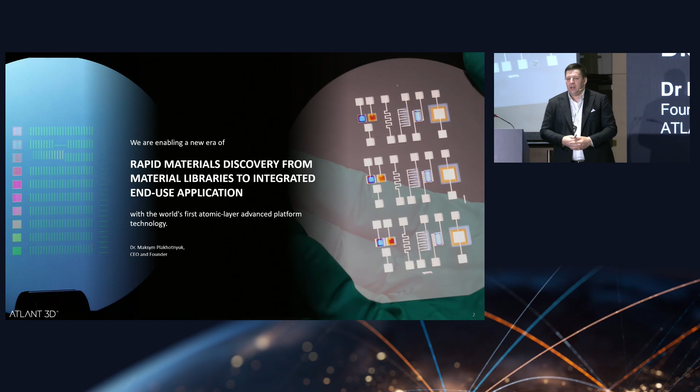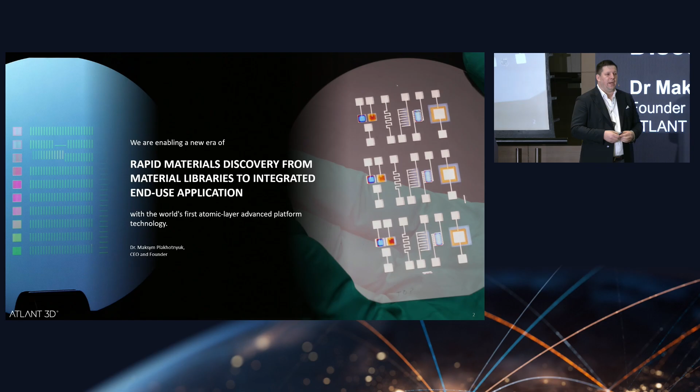So what we do, we develop new materials with atomic precision by discovering material libraries. We print materials atom by atom, and not only this, we make micro-nano devices at the same spot with the same tools. Why do we need to do this? Our civilization is defined by materials. We started from the Stone Age, Iron Age. Now we live in the Silicon Age and are moving to the AI Age. And for the AI Age, we need new materials, the more the better. And this is also the definition of new inventions.

So how do we imagine our future? We imagine our future by defining new materials. The materials that we have today are quite limited. However, they define what we can invent today and tomorrow, from clean energy to quantum computers to biotech and semiconductors. And with the AI era, we can make this absolutely different. AI can enable creation of new materials at the speed of light. We didn't do this before.

So far, we have been spending 90% of our effort on inventing materials, and they were staying in the labs and didn't leave. Today, the largest companies are trying to find new materials and speed up this process. There are geopolitical tensions to control materials, from lithium to semiconductors and more. We need to find new ways to make them. With AI initiatives, like from NVIDIA and Google and others, they are looking at how AI can help.

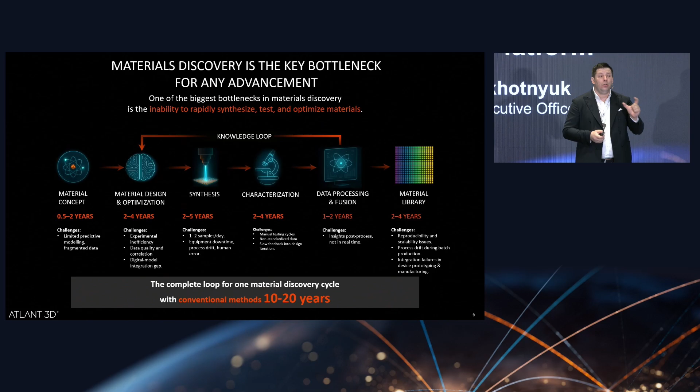However, when we look at the method of how we invent materials so far, it takes about 10 to 20 years to bring a new material into applications and industry. So where are we stuck? We are stuck at every point of the process, from how we conceptualize material, how we design the material, how we synthesize material. It all takes a few years, until we make only the library, not even the solution that we need for the applications.

So what is our solution to this problem? AI companies that exist today, that are heavily supported, are only one piece of the solution. We can invent a lot of libraries. Google itself, with their DeepMind, generated more than 2 million materials, but where do they stay? They don't move anywhere. They are all generated, but they are not synthesized. How are we going to synthesize them?

So we at Atlant invented the platform, the technology that can synthesize materials, not one, not two materials, but whole libraries. More than 450 different materials, from semiconductor to aerospace to biomedical and more. The core of this invention we call DALP technology. It's a hardware platform that enables synthesis, in situ metrology, data processing, and creating libraries. And more than this, we also create prototypes of devices that one could use.

You might think it's impossible. It is possible, and I'll show you how we do this. We use our proprietary technology. It's a micro-nozzle technology, a microfluidic device that allows us to deliver gas flows to a specific spot and synthesize material at that spot with atomic precision, one atomic layer at a time.

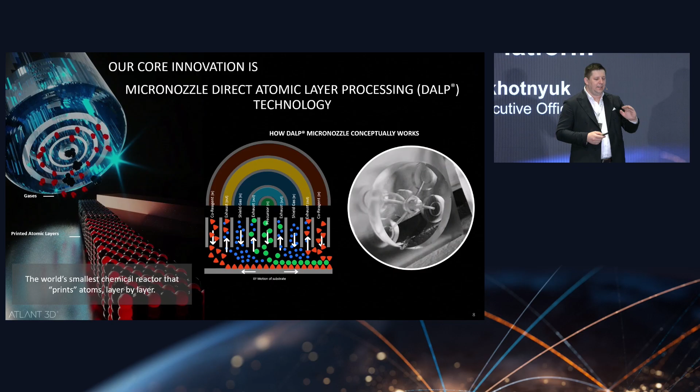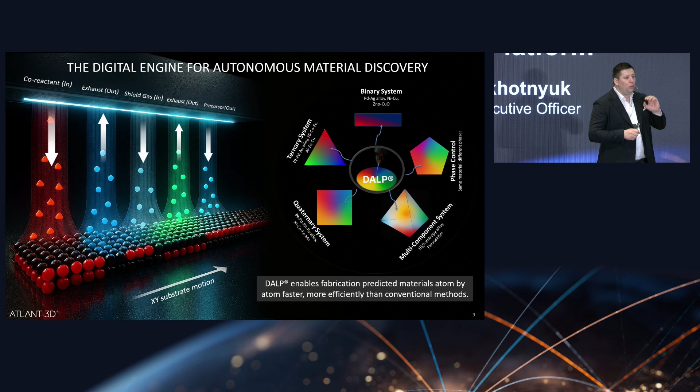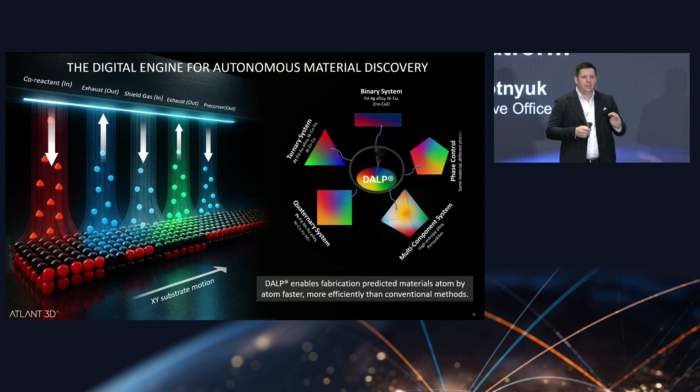So how it works: we have different flows that come onto the surface, from one reactant and a second. So we create a chemical reaction on the surface one atomic layer at a time. More importantly, you can control this process digitally like any other additive manufacturing technology, but here you can mix materials. So in reality, you don't synthesize one material, you can synthesize whole libraries of materials. Two-material combinations, three, four, five. This was impossible until today.

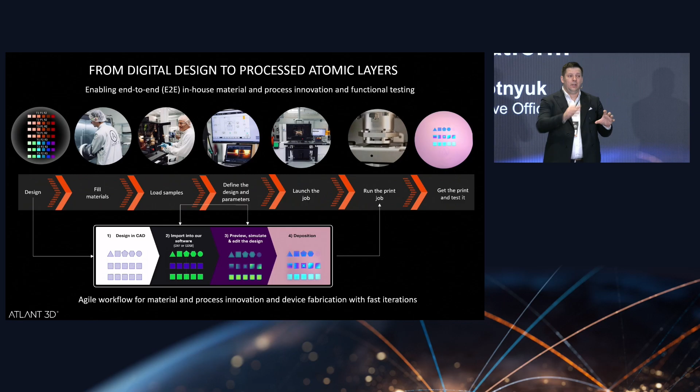This process is obviously digital, where you can design the material, submit the file similar to 3D printing, and since we also engage in semiconductors, we use semiconductor file standards, and simulate how the print would go and precisely how much time it will take. And then you get the device as you wish, not only devices, materials and devices.

This is how it happens in reality. You select the material you want from 22 categories, either for biomedical or for sensors, whatever you want to develop. You develop the library by testing many simple material tests. It happens in hours, not in years. And then when you choose the specific parameters of the material, you integrate it into devices and you see how it's actually functioning.

What materials and devices in general can you make? Materials for power electronics, for RF, for advanced packaging, for protective and aesthetic coatings, logic and memory, photonics and optics, energy applications and catalysis, sensors, environmental applications, quantum materials and frontier applications like neuromorphic or superconductors, biomedical interfaces. And this is only the overview. There could be other new material groups that we didn't spot yet.

What is the benefit when we look at the bigger picture? We make development 100 to 1,000 times faster than the conventional method. From 10 or 20 years to only weeks or months to develop the material and test it in devices. It's an exponential reduction of time, and it enables capabilities that never existed before.

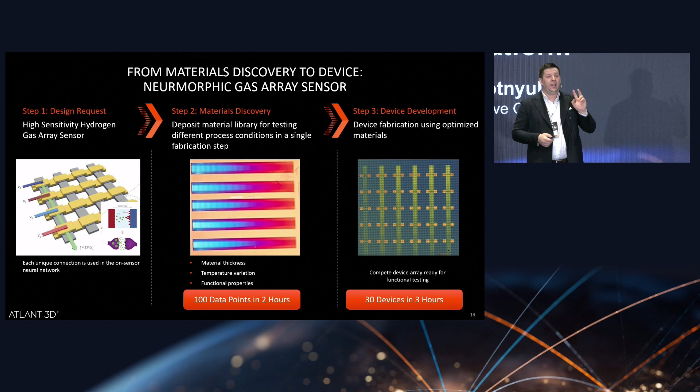Now it's moving into real industrial application. And for this, we spent only a few months with an engineer, not even a PhD-level expert. It was the engineer working on this and developing it with the partners.

This is a second example, for optics. An optical filter where you need to test and create optical heterojunctions, and also define the gradients and how to combine refractive indices. So we developed the material in only a few weeks and then completely integrated it into devices in a few hours, and then tested it, of course.

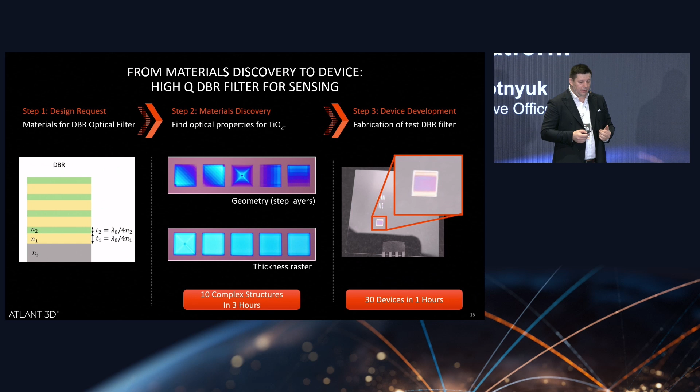So how do we make all this? We make it with different machines. Our machines are based on the same principle, on DALP technology. What is common between all these machines? That you have the same print head.

What does this mean? That you can scale from a small machine, like for zero gravity, for space, to a large machine. And if you invent the process on one smaller machine, you can easily transfer it to another one because it's a digital process. You only need to know what nozzle you use, what device will actually be printing, because this is the device that defines how you do the work.

In other technologies, you need to really know the chamber, vacuum, and so on. Here, you don't need to do this. You only need to know what material and what nozzle you use, and then you transfer, and it's working.

So right now, we are releasing the 8-inch tool that would work specifically for semiconductor applications and materials. And we are now working on a cluster that would combine different technologies together. So we integrate our technology with industrial standards today. More than this, we are now looking for partners who can help us develop the whole cluster for industrial integration.

We're already working with the UK and potentially would find a new partner soon here as well in Singapore, both industrial and research. And we're looking for who else can join us for this material revolution. It could be you. So come and we can talk after.

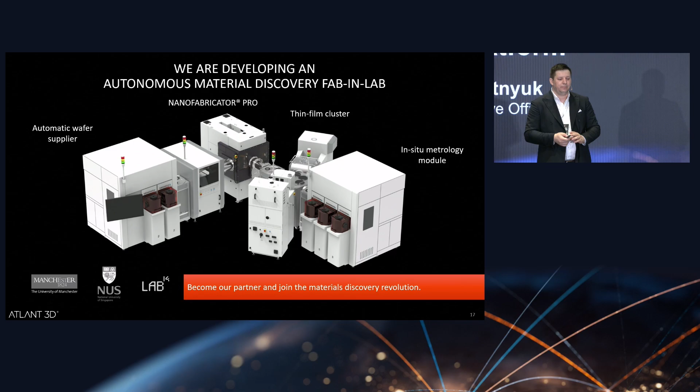So what is the opportunity behind it when we implement all this? Guys, we are changing trillion-dollar markets. And I think what I'm showing you here is underestimated. Because the semiconductor industry, particularly since I'm coming from there, hasn't seen a revolution for 70 years. We still operate on principles that were defined in the 60s or even earlier.

While we bring additive manufacturing today to print concrete buildings, where we print metal structures, the semiconductor industry is way behind. We can't even invent new materials there. Imagine what we need to do to change and how much it will influence all of us. How fast we can make microchips, quantum computers, superconductors. We will create our future not in decades, but in years or less than this.

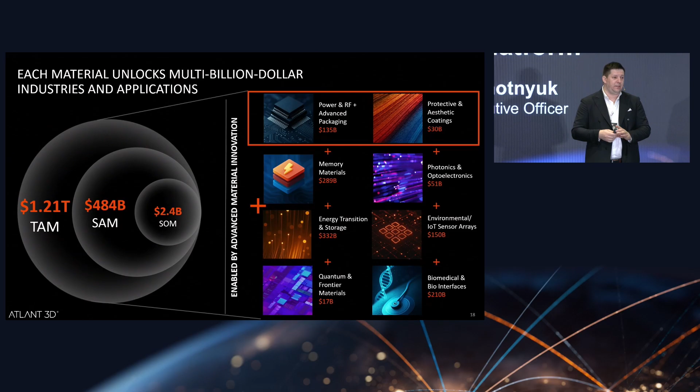So how do we operate? Our strategy is not only to provide the equipment; we define it in software, we build the platform. We build materials, libraries, processes, integrate them into customer applications, and we are looking at integrating strategic partners. All this we call the ecosystem. We are developing ecosystems. Ecosystems that will change industries.

We're looking for you to be a partner in this ecosystem, locally here in Singapore or in New York or in Japan or elsewhere or in Europe. This is our plan for the next few years. We already have our first ecosystem in Denmark, where we are located. We're looking to establish a second ecosystem here in Singapore. That's why I'm actually here today with you.

And we want to enable Singapore particularly to be the AI material-enabled country, creating the future with the speed of light that no one even thought about. Creating not only materials but applications that could only be possible when you bring innovation with the cutting edge.

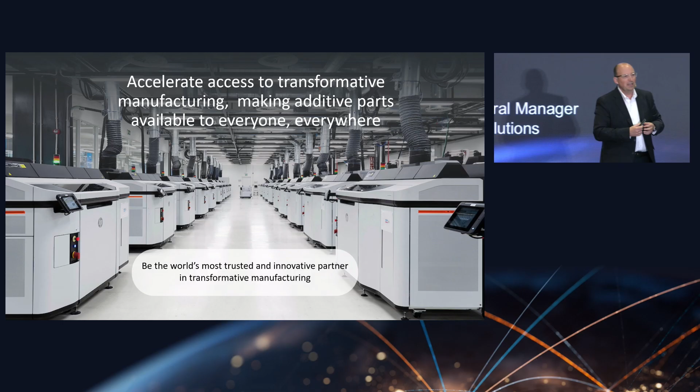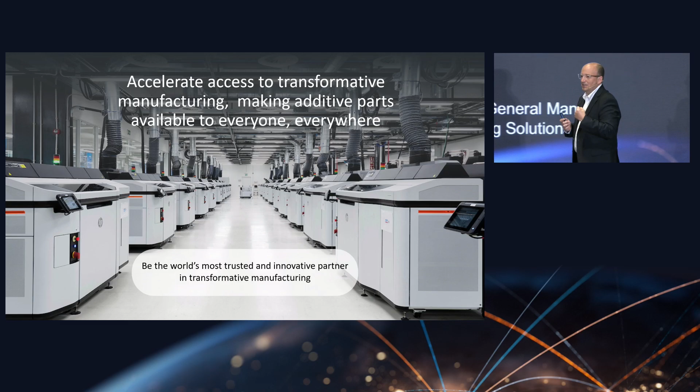In the current environment in 3D printing, there is a lot of turmoil. There are a lot of companies that are here today and not here tomorrow. Our strategy is to be there. Many of you saw the video we presented yesterday on the Barcelona facilities, which are the headquarters, together with the facilities we have in Singapore and in the northwest of the US. We did that video because when we bring people to Barcelona, we can showcase the innovation, energy, and investment we're putting into this business, and therefore the trust of those customers increases.

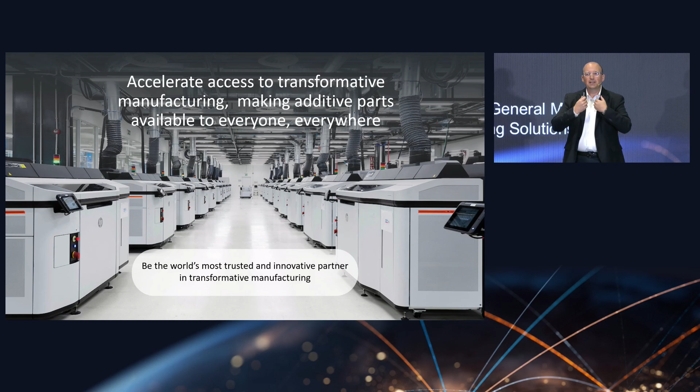Not all the customers can come to Barcelona. They're all invited, but not all of them can come. So we wanted to put that video out to give them a glimpse of what is there, to give them confidence that we are a trusted partner in the industry, that we're not here to go away next year, we're here to stay, and that we continue investing with energy to drive this transformation.

And what it drives, whoops, so my screens disappeared here, if you can fix those.

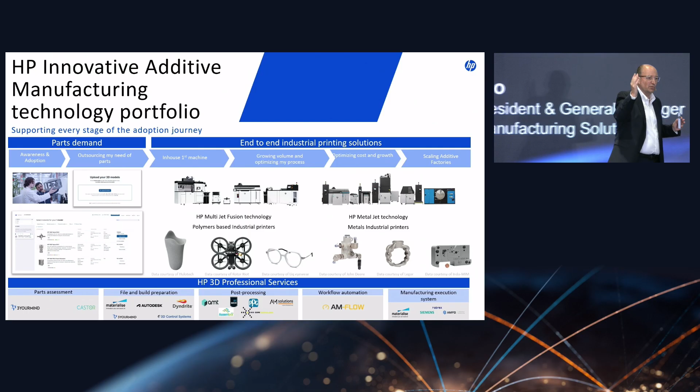So basically we want to help our customers at every stage of the adoption journey. And what that means is that from the moment they start considering additive, we have a network of service bureaus that we've been building over the last 10 years, and it's very extensive, so they can have access. To the moment they decide to insert their first solution, we have a portfolio of solutions to help them from the very beginning until they really want to scale in

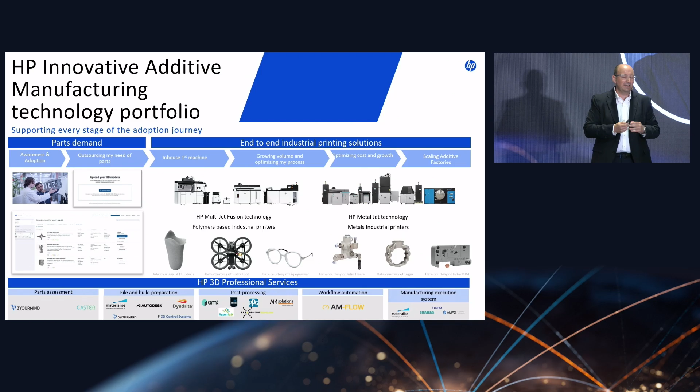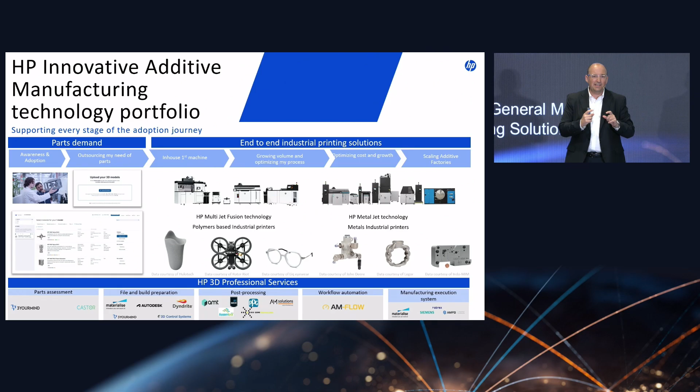manufacturing. And at that choice, there are customers that decide to insert their own manufacturing. There are other customers that decide to externalize to a contract manufacturer or one of our digital manufacturing network members. And in all of that, I'm a firm believer that if something already exists and somebody has solved a problem, don't reinvent it, don't do it again, don't try to compete.

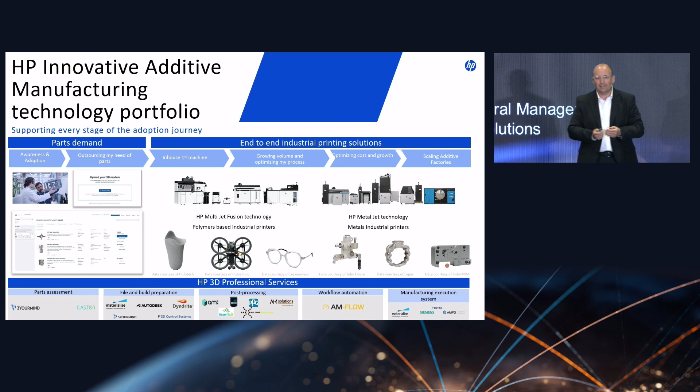So we are a firm believer in this industry ecosystem, to partner with people that have already solved problems, to stitch solutions and put together solutions with customers from different players in the industry, rather than try to reinvent everything again. So if we look at ourselves as an industry, it's obvious that everybody understands that it's a technology

that's proven for prototyping, that is proven for final parts, but as Matthias said, it's easy to do one final part. The difficult thing to do is to do hundreds of thousands of that part in a repeatable way with the right equipment efficiency, the right yield, and that's called manufacturing, right? And that's what we'll drive.

In order to drive that, we have 3 pillars, and I'm going to go very fast through this and jump into use cases. Number 1 is the use of AI. Downstairs, Namik is showcasing a great agentic AI use case for machine maintenance. We're having our own, at smaller scale, maximizing the AI tools that are available to us in order to optimize the maintenance, predictability, build management for customers. And that's something that we'll continue using more and more.

The second one is TCO and sustainability. To really drive production adoption and manufacturing adoption, we need to make sure that we have competitive costs with other technologies. That is our gateway to entrance. Once you're there, then you can take all of the other advantages of additive manufacturing in terms of geometry, complex geometries, where you produce, etc.

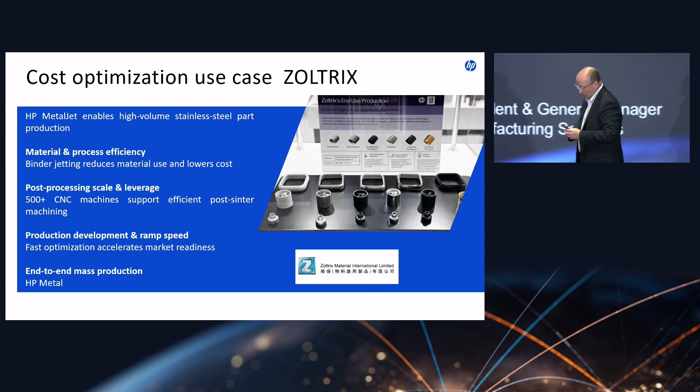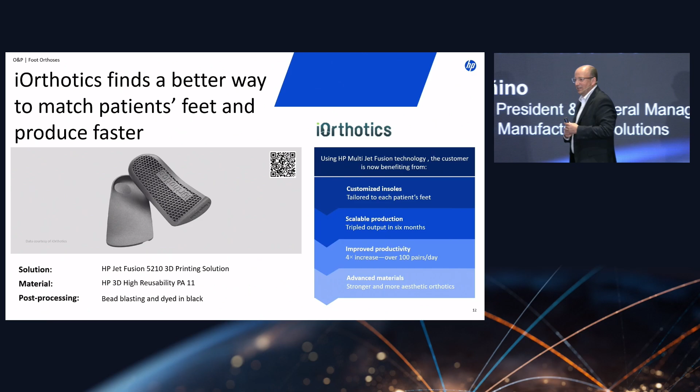Moving to Australia, this is a medical use case. iOrthotics started in Australia and through partnerships, they're operating globally right now. They're printing hundreds of thousands of insoles. This application, our polymers application, is great. It's one of the leaders for doing this type. And the nice thing about this application is that it's helping to improve the life of many, many people across Asia Pacific and across the globe.

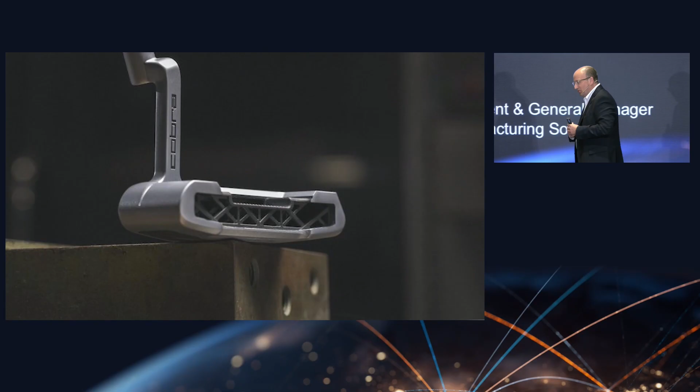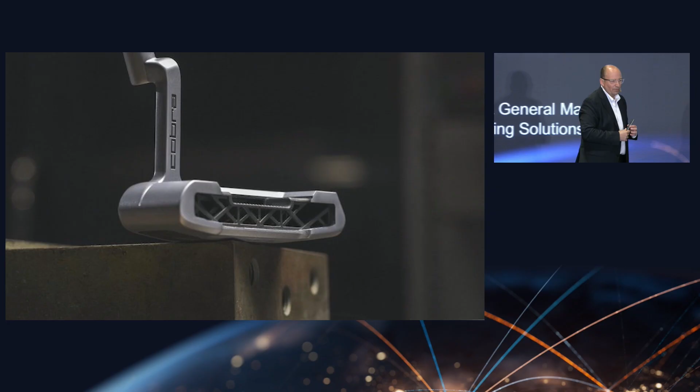So that's another one. The next one I want to mention is Cobra Golf, and this picture is based on our Metal Jet technology. We're printing tens of thousands of golf clubs. These are the putters I'm showing on the picture, and everything that's inside basically is 3D printed. And they're printing tens of thousands of clubs here in Asia Pacific for the global market.

But one picture I'm not showing is, for those that play golf, you have the putter and then you have the drivers. In the middle, you have a number of irons, from the wedge to the 5. All those irons, on the mid-range and high-end brands, have a plastic part on the back that covers, and I don't have a picture for that. We are producing today 1 million of those parts a year in China. So many of the brands selling those are being 3D printed, because it's a complex part, and then they can vary the weights.

So, you talk about a production use case, 1 million parts per year. That I call production, okay? And that's already being done with additive, with the right quality, with the right yields. I'll be able to share more details over the next few weeks and hopefully some pictures.

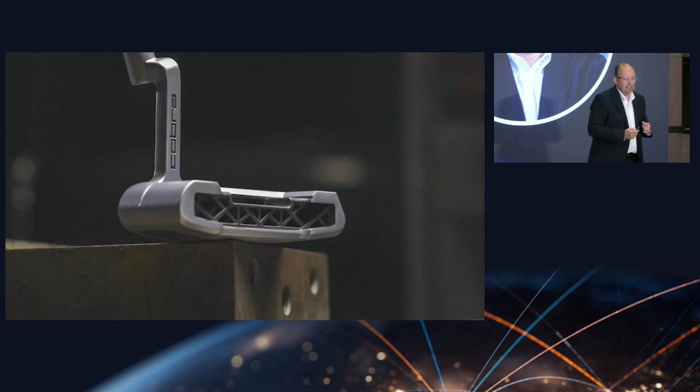And then one of the segments that is growing fastest, and this is one use case that is not Asia Pacific in particular, is drones. Drones go across a different array of segments, from commercial, delivery, defense, and even medical. I was at the Veterans Administration Hospital Network a few weeks ago in Seattle, and they're working on a network of drone delivery systems interconnecting the different hospitals, so they can share blood samples, medicines and drugs much more efficiently.

And actually, they have a social benefit as well. They're transferring the jobs of the illegal hunters. To fly every drone, for regulations, you need a pilot. So they're training people who are trying to make a living from illegal hunting to be drone pilots to watch the savanna. So they're doing that change. So it's a great use case, great story. And they've helped develop.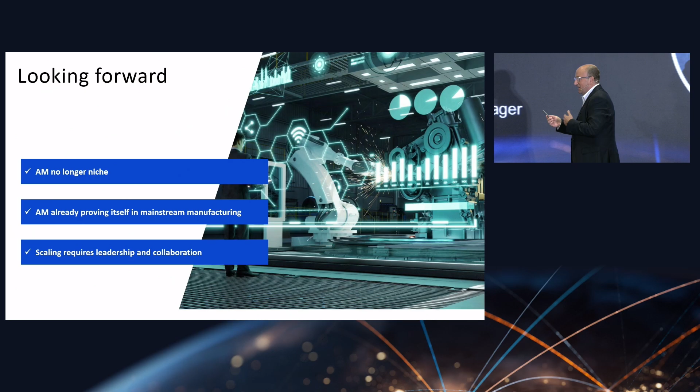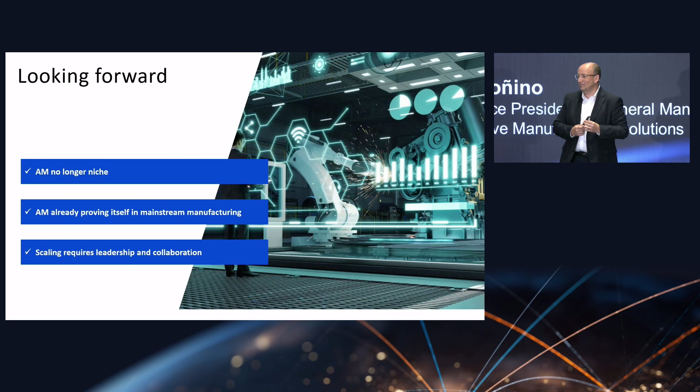Proving itself that we can be in manufacturing, and then to scale it further. I think everybody in this room is a believer of additive manufacturing, otherwise we would not be here, and is very aware of all the use cases. I think the key is that we continue spreading the word, we continue credibly spreading the word that additive manufacturing is ready for manufacturing, so we have more and more customers that are either unaware or skeptical basically adopting this technology. And to do that, again, there is nothing better than to partner, okay?

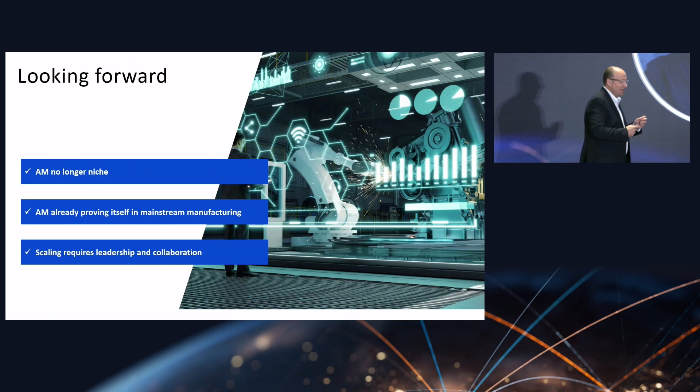And this is what we announced yesterday, a partnership with NAMIC and DAOE Technologies to really help drive and scale the adoption of this technology in Southeast Asia.

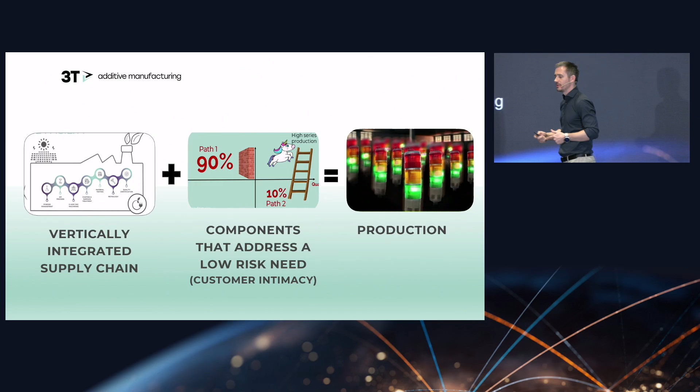And then comes the hard work: operational excellence, delivering on commitments, taking cost out systematically. And the more production you get, the more opportunities you'll get to take cost out. It just keeps on getting better and better.

Each year we became less reactive and more proactive, which gave us the visibility to make better decisions and drive customer focus and systematically reduce our costs even more.

2 months ago, we announced the acquisition of 3T by a large Austrian multinational company who are centered around precision manufacturing. This means that 3T isn't just doing this in the UK now. We also have the capability to make a finished component using metal AM in the US, Austria, and the UK. And SBO also have significant manufacturing footprint in Southeast Asia, both in Vietnam and here in Singapore.

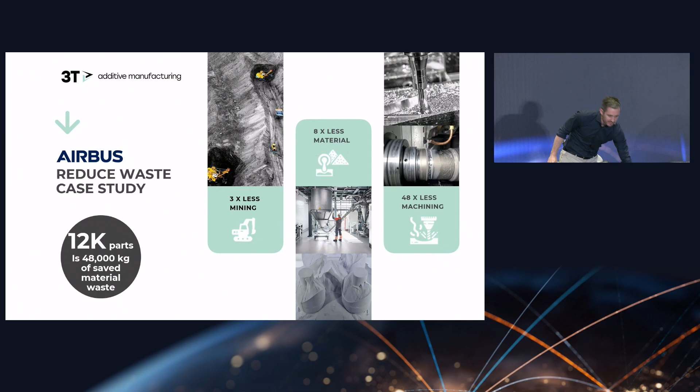And this example here is one of the best examples of material waste I've seen in additive, and it's an example from Airbus's machine. This is a titanium assembly of 2 different additive manufacturing parts. One is from powder bed, which is from 3T, and this is DED from Norsk Titanium. The amount of material saved here could fit in a 1 meter cubic box.

And there's more benefits. When you integrate the supply chain into one facility, you're significantly reducing the amount of logistics CO2 footprint. And when you're plugging your facilities into renewable energy and you've got the entire value chain in your facilities, you're significantly decarbonizing the end-to-end manufacturing process.

Now, this GE example is the only example that's really talked about in additive in terms of its sustainability credentials. And this is the GE nozzle, which I think saved 15% on the fuel burn. And that's using the capabilities that AM has to create parts. And that tends to be the narrative around AM.

But there's also the end-of-life waste. We're seeing that the microstructure that we create in these additive parts is lasting longer when compared to castings, which means these parts are lasting 3, 4, 5 times longer in their applications, which means our customers need less parts, and less parts are going to waste.

So we're back to where we started, and I think additive manufacturing really does have a choice. We can continue being the promising technology that just needs 1 more year, 1 more grant, 1 more breakthrough, or we can become the integrated manufacturing solution that stands on its own 2 feet before it's too late and the subsidies go forever.

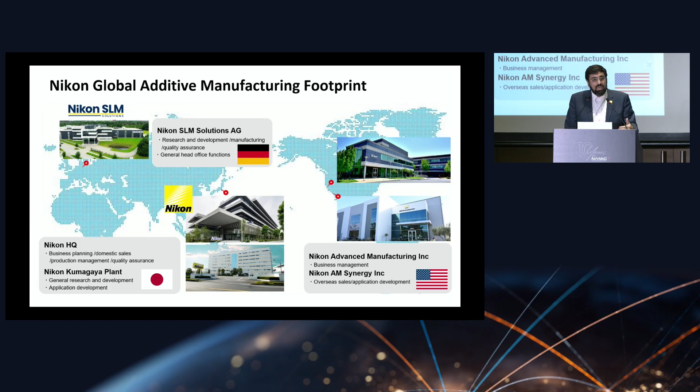Okay, so a wonderful talk, especially from my colleague at 3T. When you're developing your business case for additive manufacturing, and it's very critical, you must balance your economy equation. Otherwise, you will never actually be able to have the right argument for why you should do this with additive manufacturing. I'm not saying cost, I'm saying economy equation. The economy equation is different from cost.

There are so many other considerations when you're actually balancing your economy equation other than cost. It's like lead time, accessibility, maybe security, supply chain issues. You have to consider all those tangibles and non-tangibles when you're building your economy equation. If it is not balanced, just because additive is cool, because additive is a nice, interesting technology, it will not be adopted.

Now, when we look at the ecosystem for industrialization, the first thing that we have to look at is the value stream of qualified AM part manufacturing. At the end of the day, we will be successful as machine manufacturers, and the CMs successful as contract manufacturers, when we make quality parts at scale and we can sell them. So it's a different but similar explanation of the AM ecosystem of making high quality parts, and the cost associated with each of the steps.

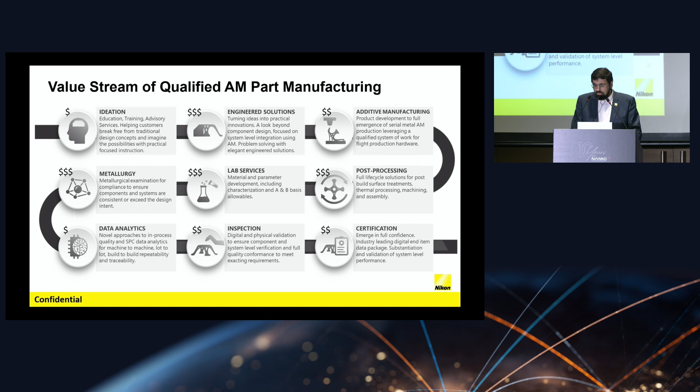And then if you have to go through a certification process, FAA, FDA, NASA, NAVAIR, NAVSEA, depending on who's your certifying body, then there is a process and cost associated to that. So this can be looked at in different ways. Now this is an ecosystem of qualification and certification. In the previous talk you saw all those breakdowns of what is associated to the overall cost of the part, and what needs to be in place so we can successfully say that we scale additive manufacturing at the level that we want, not just one part, two parts, 100 parts, but thousands and thousands of parts.

We need to have the engineered solution capabilities. We're using a lot of modeling and simulation tools. We should not be shy about using those tools. These are really, really effective with all the computing capacity and all these tools that are out there. These are really helping us reduce the cost of making high quality parts. Additive manufacturing, obviously using our machines, then the post-processing: depowdering, removing the support structure, cutting the parts from the build plate, heat treatments, HIP, sometimes a few steps of heat treatment. These are all associated with cost, and then testing, validation.

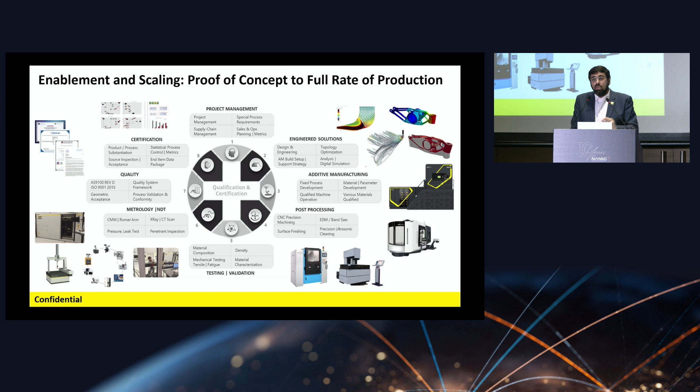Metrology: we are lucky to have Nikon Metrology, all the metrology, CMMs and X-rays, within our ecosystem, and we're using those, and then getting to quality and certification. Okay, so please remember this. These are really important. When we are talking about scaling additive manufacturing, you have to be able to scale all these steps, otherwise you will not be successful.

One of the backbones of our Nikon AM solution for our customers is material data. A lot of what we're doing is data-driven for our process qualification, helping our customers adopt these technologies faster and much cheaper. We have a lot of data within our Nikon AM ecosystem. For every machine that goes through the process of release to customers, we're making a lot of coupons. We still have to make a lot of coupons, although we want to stay away from that, and I'll have a slide to talk about this.

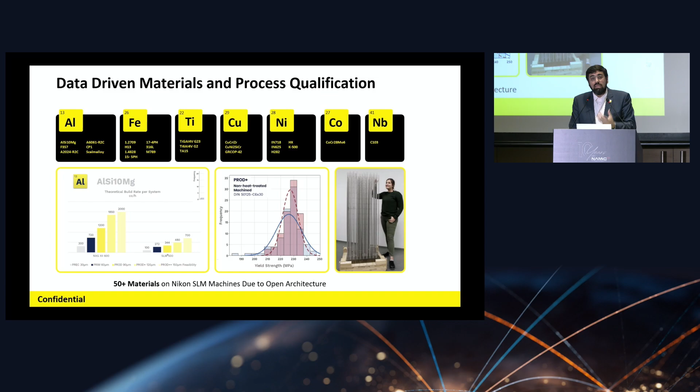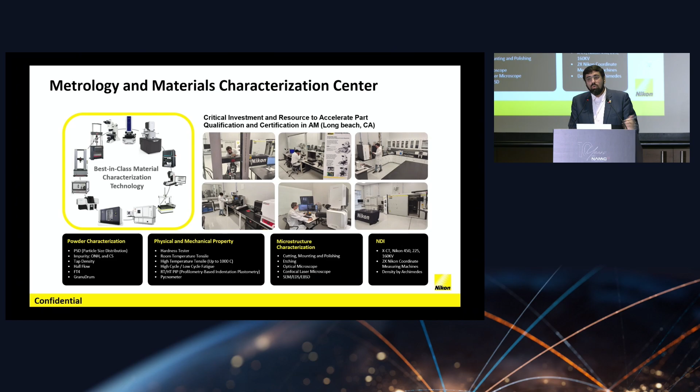So we're making a lot of coupons, and then everything is data-driven. And we realized the importance of building materials testing within the facility that makes high-quality parts. So we built A to Z materials testing capability, from testing the powder all the way to looking at the parts with XCT.

Okay, so nearly 30–40% of you are from academia. I have to put some ideas out for you to think about, how academia can help accelerate the adoption of additive manufacturing at scale. I mentioned the challenges that we are dealing with, the costs associated with qualification and, in general, introducing new materials. We had a small chat here.

I don't want to introduce a lot more materials. Every new material that you're introducing means that you have to think about a lot of things, including the data, the sourcing, the quality. If we can somehow all together agree and work with few materials, at least for now, I think we'll see a much better payoff.

But to just go through the challenges, today we have very time-consuming and slow processes for the qualification. It's very cost-intensive, very expensive. The alloys and materials that are usually introduced are not really AM-friendly. We're using old atomization technologies. There's some level of platform dependency and lack of standardization.

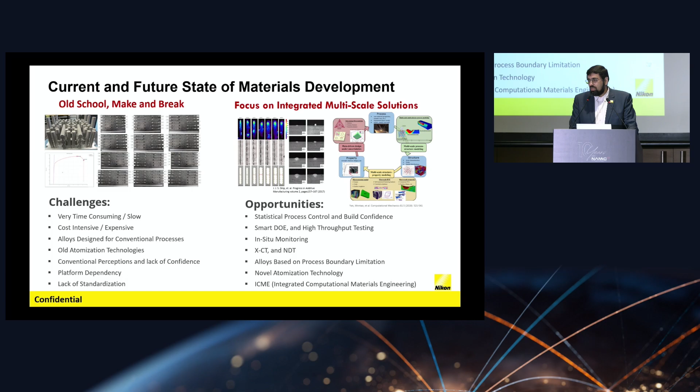And for that, we have a solution where we think that there are opportunities, and I'd like you guys to think about that as well: getting into more smart DOEs, using in-situ monitoring, using non-destructive testing more smartly, novel atomization technologies. And if I combine all these together, we're talking about bringing ICME at scale, integrated computational materials engineering.

A couple of examples: we're heavily working on a material called CP1. It's the material that Constellium, an aluminum manufacturing company, invented, and now they're making the powder. So this alloy gives us a very unique capability in terms of processability, as well as high thermal and electrical conductivity close to pure aluminum. So you get the 6061 T6 properties with the conductivity of pure aluminum.

And this is the material that we see a lot of our customers are now trying to adopt, especially in defense and aerospace, for thermal management applications. And we have invested a lot in the past few years to bring this material to the United States, qualified on different platforms. And we have some government funding right now to expand this activity.

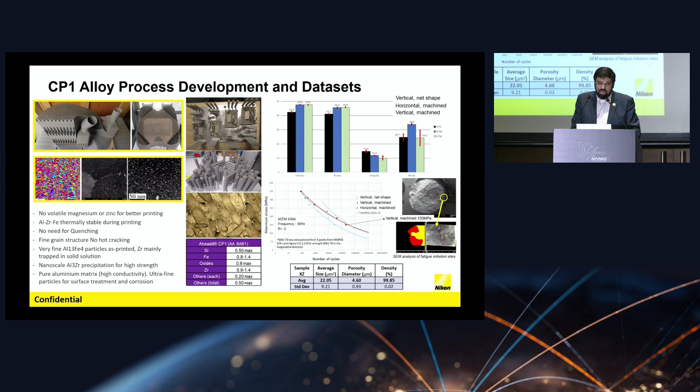Another area where I think Singapore, universities in Singapore, can contribute a lot is in situ monitoring. Why in situ monitoring? Some of these parts that we are making, 1.5 meter, 1 meter, may take 20, 30 days in slower machines, and 7, 8 days in our faster machines. I'd like to know if there is an imperfection, a defect, so I can reject a part on day 2 rather than day 21 when the print is finished, or after spending a lot of money on XCT and other types of inspection.

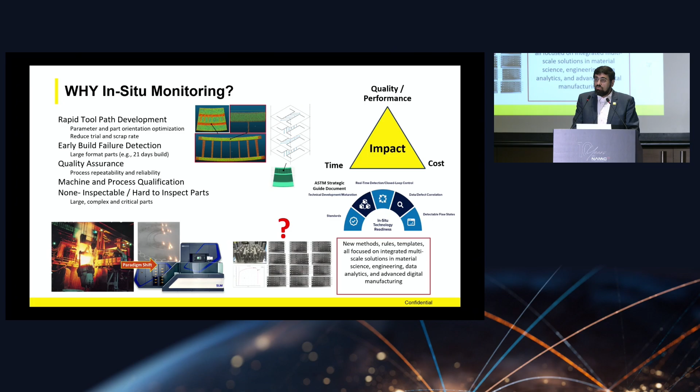So there is a very good use case and driving force for in situ monitoring in terms of quality assurance, rapid toolpath development, and early build failure detection. We actually spent a good amount of resources and energy building our own in situ monitoring. There are 2 ways Nikon looks at in situ monitoring today.

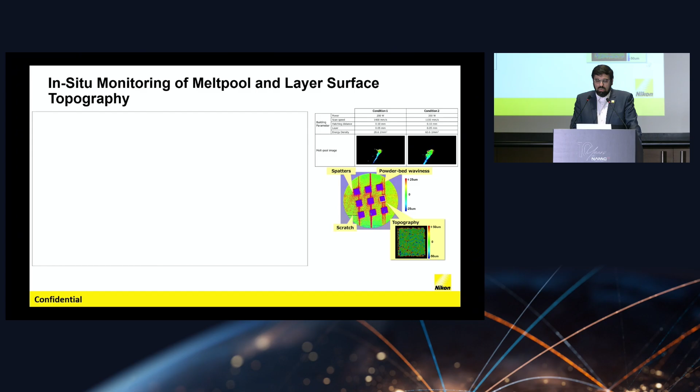One is looking at the topography of the surface with fringe or structured light, so we can understand the topography of the surface before and after recoating, and the other is looking at the melt pool and measuring its temperature. For measuring the temperature of the melt pool, you can't just use one wavelength, so we built a proprietary tool that looks at 2 wavelengths and measures the actual temperature, so we can see the actual size of the melt pool. And the question is, how do we correlate all this data into quality and into making a good part with a balanced economic equation?

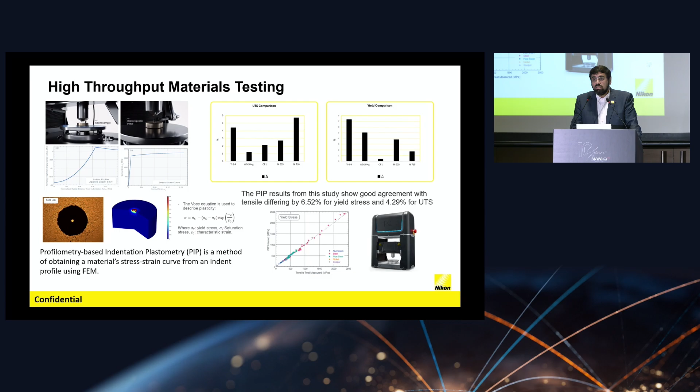And we are going to expand our relationship with them and do not only room temperature but also high temperature mechanical testing with this. The good thing here is, very quickly, with just one indentation, you can read the yield and UTS. This is very good for process optimization and quality assurance, rather than making tensile coupons, testing, and spending a lot of money there.

Let me stop here. I hope that I could explain a little bit about the Nikon AM ecosystem. We are a partner for our customers with a holistic, end-to-end solution, from the engineering solution all the way to the qualification.

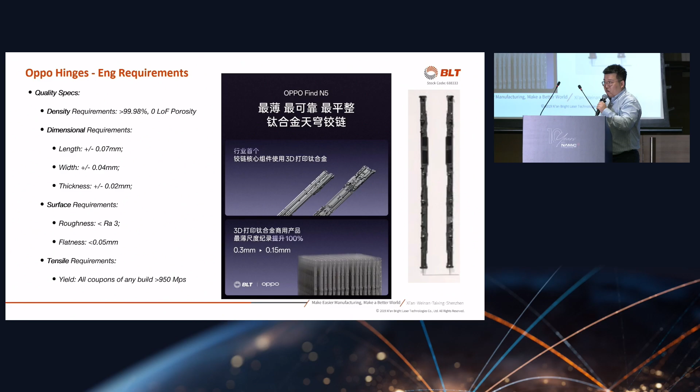Yeah, and then the first 1 million needs to be delivered within 10 weeks. That's also a trick. If I'm not wrong, these prints are about 2.5 days for around 1,000 of them. So you need probably 50 to 60 or 70 machines printing together, and you need to ramp them up, qualify them, validate them, all within the first few weeks. And then you start producing these things every single day, and there needs to be no problem.

So overall, these are the cycles of what we call mass production phases, all the way from concepts to protos, from protos to your engineering validation, design validation, and then you start ramping, and after ramping, you do your sustaining. So it's actually not just 3D printing. It's engineering, but 3D printing happens to be the technology that we are using to engineer new products.

And then you have timelines, processes predefined, and readiness that you need to map out. And it's not just the readiness of 3D printers. It's the readiness of everything: method, machine, material, manpower, environment, every single bit, even that carbon fiber exhaust pipe that may be letting carbon fiber out to the air. If that's not qualified to the regulations, you cannot ramp. So there's stuff like that that's way more than machines.

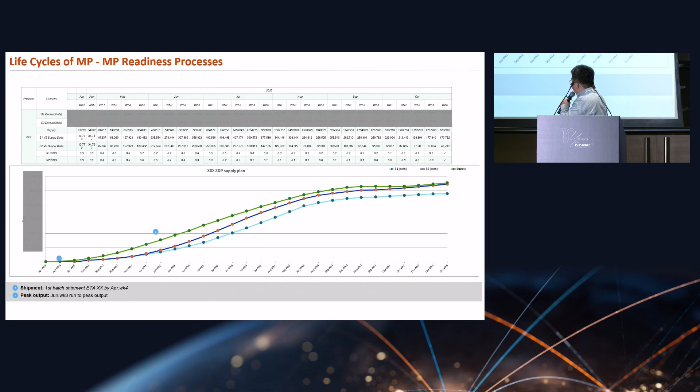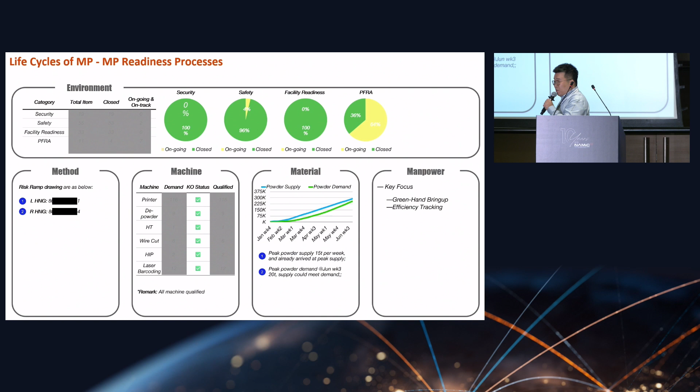And then you have the life cycles of this, and as the gentleman from 3D said, people need backups. And that's especially true because people never trust additive manufacturing at the very beginning. They don't trust it. They want to design an adjacent technology that's also able to do it. But if they can't, like this hinge, they freak out.

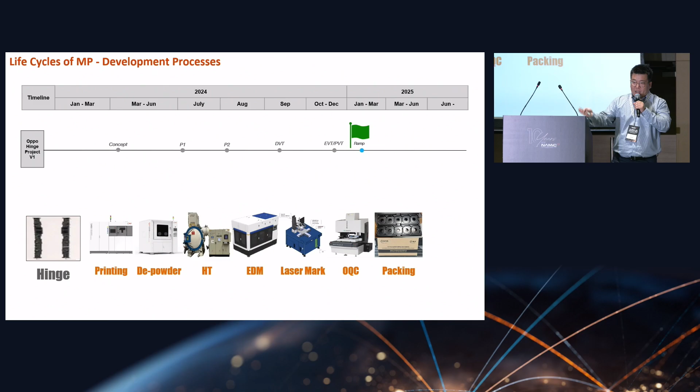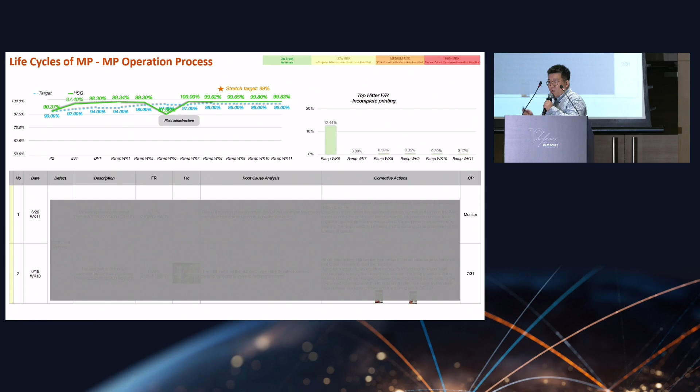They make you do scenario 1, 2, 3, 4, 5, 6, 7, 8, so that in the worst event, when you have an earthquake, a flood, everything together that destroys your factory, you still have another factory that will make sure the product launches on time. So that's the kind of stuff we're made to do, so that people get the comfort to say, let's go, we will ramp with additive manufacturing 100%.

And then obviously, while operating, you have all these MES systems that manage everything, track everything, and learn from previous failures, so that we know what to do afterwards.

Speaking of future innovations, I guess most gentlemen have already mentioned everything. I would just touch upon the importance of being able to predict accurately, being able to sense what's exactly happening during the print, and being able to be assured that we're executing whatever command we want to execute to the full extent.

And we need that cycle to complete, and then we need to add data analytics to it, so that we are able to predict, we're able to sense, we're able to potentially correct, but not necessarily correct, but we just need to realize, and afterwards we need to analyze to see what kind of things are not being done correctly. And if we have those cycles done in the next few years with additive manufacturing, I think this will be the easiest technology to manufacture ever.